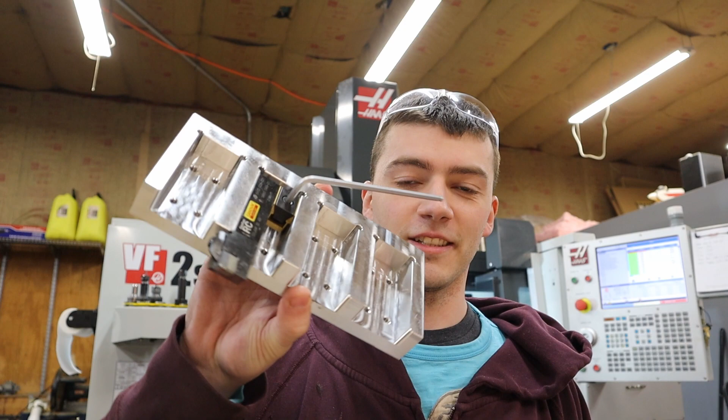We'll be manufacturing the side block out of this lovely piece of 6061. I also realized the main block's made out of 70 series, so that's cool.

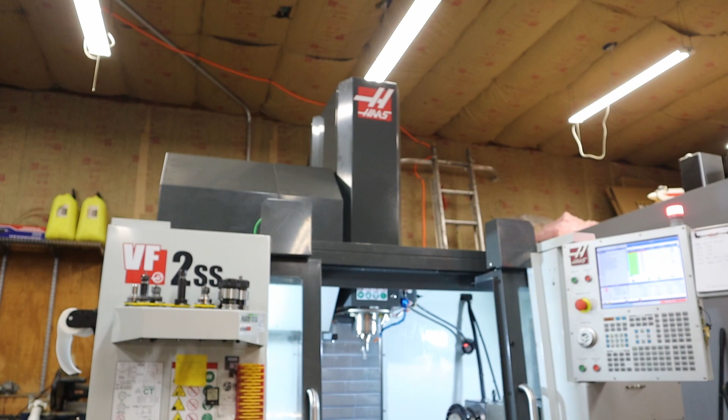Alright, same thing. Let's go over the CAD, and then we'll get right into it.

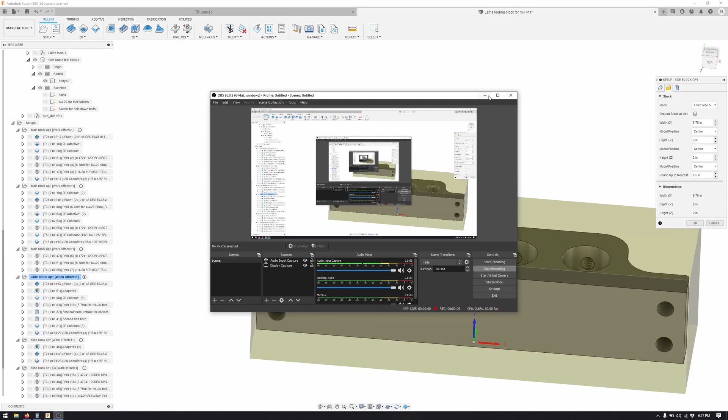If you're wondering what that buzzing noise is, it's the phase converter, so no, I'm sorry, I can't take it out of the audio, but that's what it is if you're wondering. I'm not sure why, but this microphone fixed it up rather well.

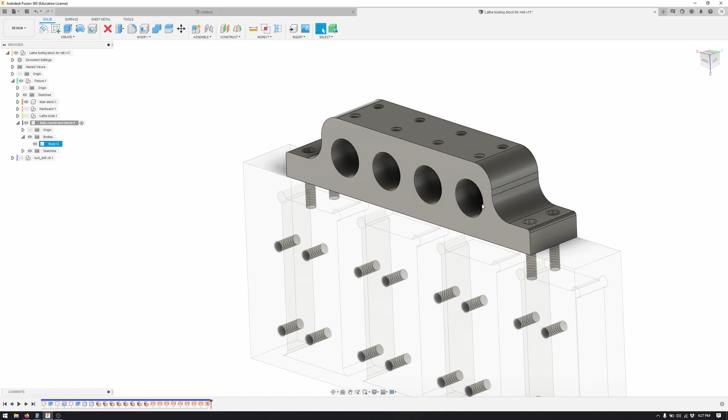Okay, so like yesterday, this is the side block. As you can see, I added some fillets to the edges because I wanted to machine the block up like this and go from the top down and then do the drilling and tapping first. Then when I go on the side and bore the holes, it would clean out any burrs left from the tap.

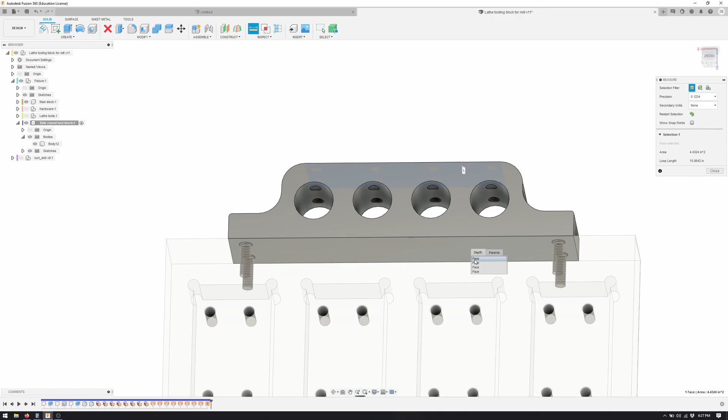Well, this is 2 inches long. Sorry, it's 1 1/4. This distance to this distance, this face here, that's 150, and the 5/8 tool I'm using has a flute length of 1 1/4, so the max I can cut is 1 1/4.

I did just order one reduced shank end mill because they're so expensive, and I don't use them very often, so I just ordered one. Inevitably, what happens when you order one thing, you break it the first time.

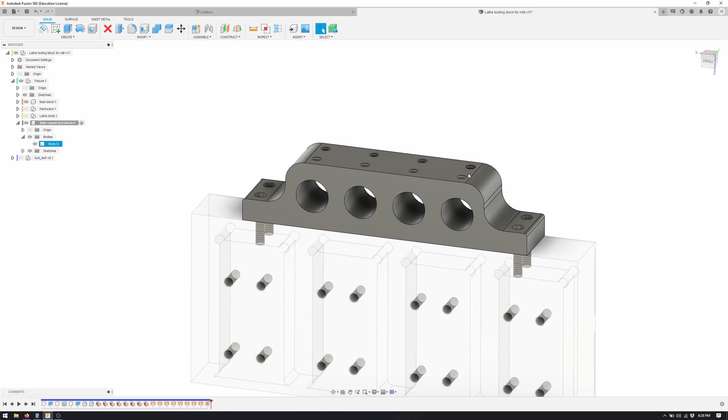But anyways, so basically now I'm going to machine from the side because it's 1 1/4, so that's our flute length, and I just added these fillets to facilitate it not wanting to jam itself in the corner and chatter like it did yesterday. That would just kind of aid in that.

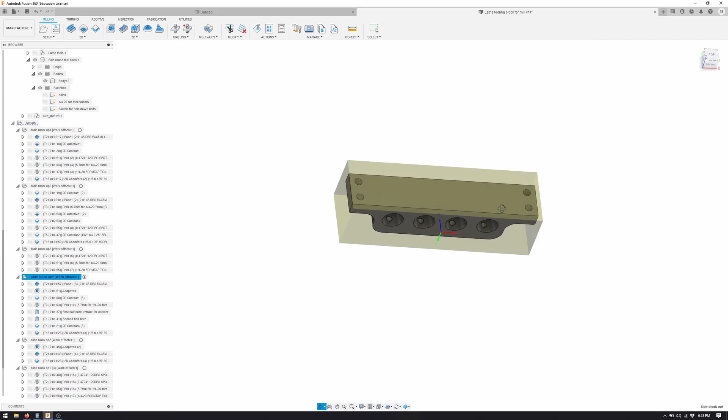Alright, so for Op1, we're starting with a 2x2 piece of 60 series aluminum. So we're going to face down the block. Let me turn on in process. In process is awesome, the stock thing. Face down the block, adaptive obviously around, then we're going to contour and finish it up.

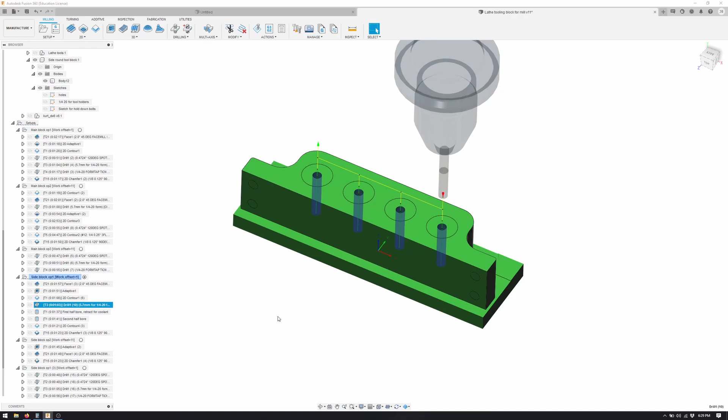Cool. We're going to pre-drill, or just drill to help in our chip evacuation when we go to bore these out. Then we're going to bore them out with the 5/8 tool, and because the bore diameter is so thin, it's probably going to go pretty quick.

Usually I like to avoid chip recutting here, depending on how much coolant flow you have, so it would be good to have something like through spindle coolant.

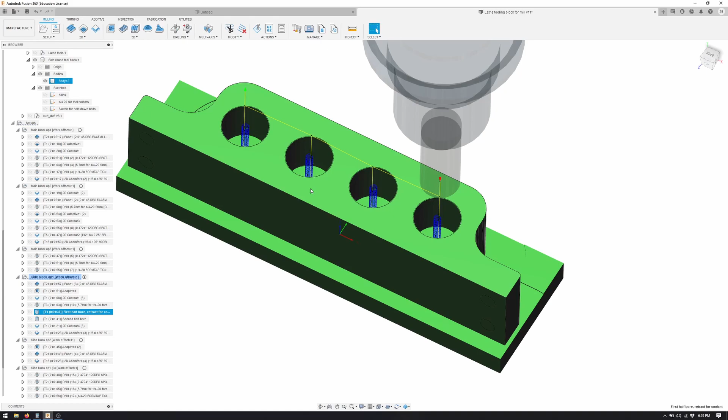So what I'm going to do, since I don't have that, and this is the best idea I came up with in the shortest amount of time, I'm just going to bore half the hole, and then there's a second bore that's the next half.

So basically it's going to retract out, and that's going to allow the coolant to get in there and flush any chips out. This is probably a giant waste of time, but anyways, I'm going to try that.

Then final contour. These need to be 3/4 because this is a tool diameter, and it needs to be pretty precise, but not as precise as if you were making this for the lathe, because obviously a 3-axis mill, we have Z height adjustment as opposed to a normal 2-axis lathe.

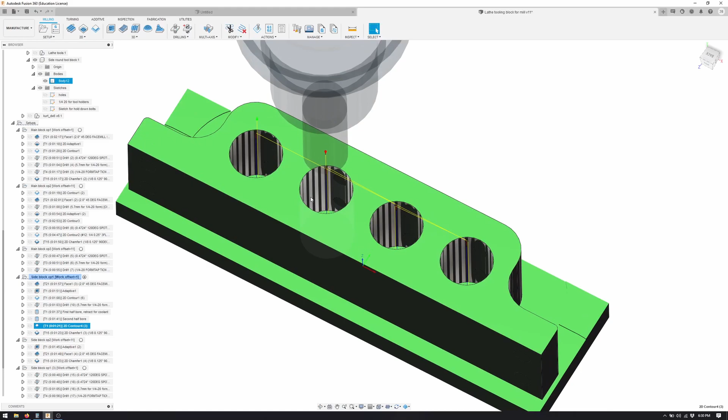So as long as these are straight, they don't basically need to be as precise as you would need them to be for a lathe. Then we're just going to chamfer, finish it up.

That'll be all good. Then for the flip, basically do the same thing as yesterday. Stick a gauge block or something and just find the side. The nice thing is this thing doesn't stick that far out of the vise.

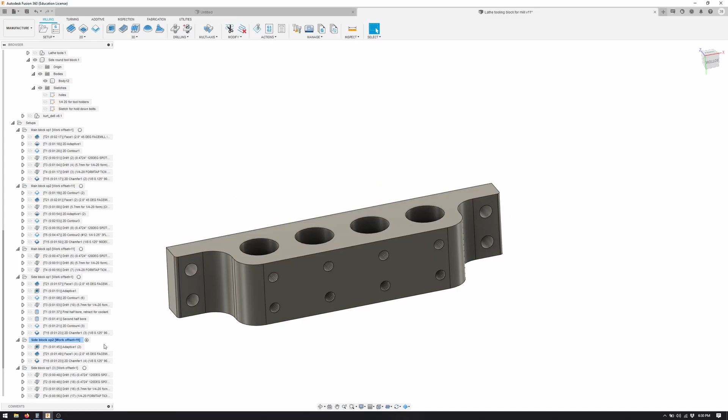This time, instead of contouring the block, the stock is actually going to be square when we get here. And there's no way to select the stock as a contour unless you draw a sketch or something.

So I'm just going to use a 3D adaptive, and I just told it to go from model height and then down 3/8 or something. So it's basically going to adaptive clear away that top hat, and I left enough material on this side, this flip, to where it won't chatter on the hat side.

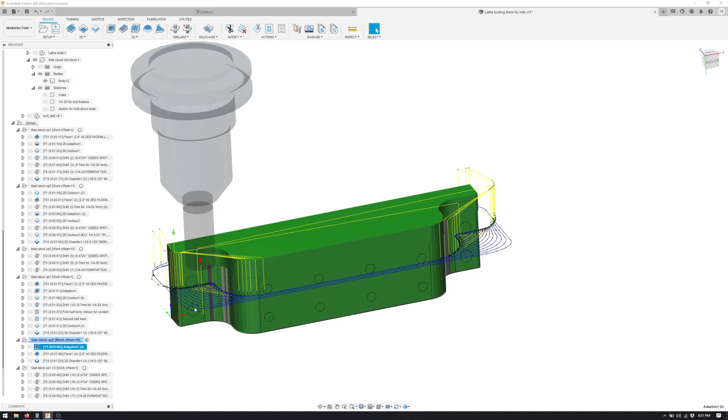I think this is 1/4 inch thick. Yep, so then you want to leave radial material so you don't hit your part. Face down the rest. I would go from the X direction, but like I said, the chuck's in the way of the 4th axis, so you just want to be careful.

And yep, then obviously final chamfer, make it all nice.

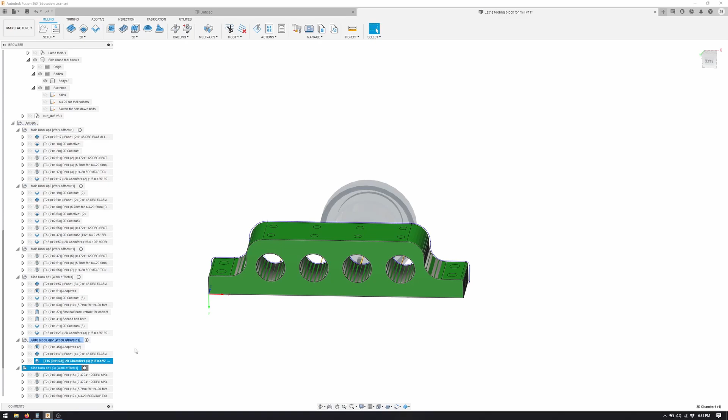Then we get to OP3, which is going to go back into, hold on, this is kind of weird. This should be, okay, it's correct. So we're going to go back to that default G54, which is top of the parallels is your Z height, and then I'm going to just reprobe it in the center.

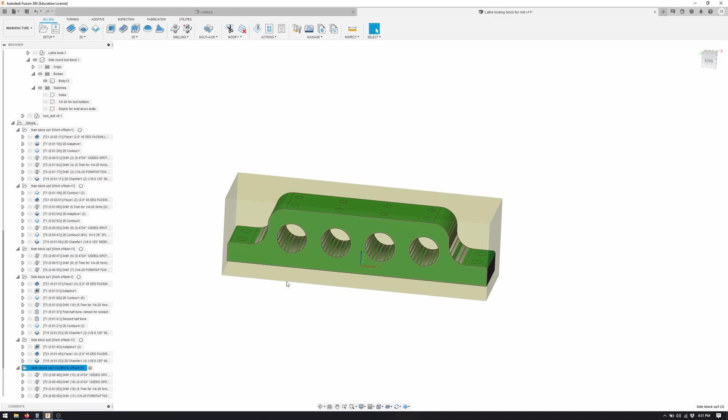We'll have a done block at this point. We're going to spot drill because we're going to form tap, then we're going to spot drill these because I just felt like doing that. Oh, because the chamfer tool doesn't reach down there.

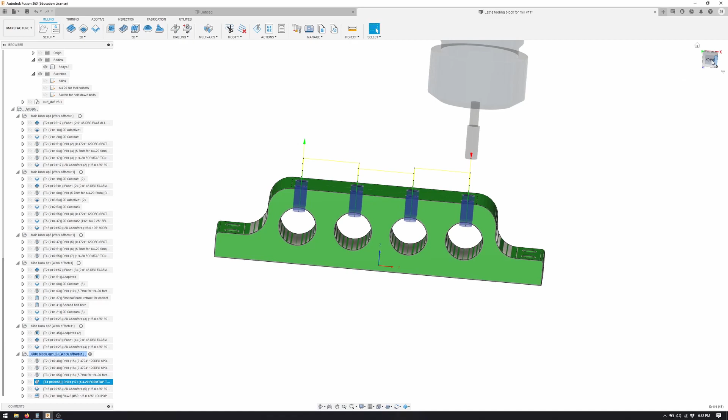Then we're going to drill, form tap like yesterday, making sure to go into the hole and get full thread depth, unlike yesterday on our holes. The reason I wanted to avoid this is because when the drill and the form tap come in here, they're going to want to squeeze material into our bore, and that's going to be a problem, and deburring it is quite a problem too.

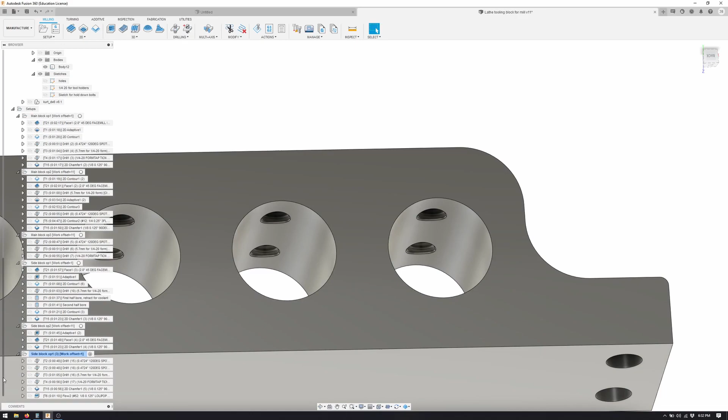So then we're going to chamfer this edge. We're going to come in with a lollipop end mill, and this is one I use for the knife part, so it's really tiny. And we're actually going to use flow and attempt to deburr the backside.

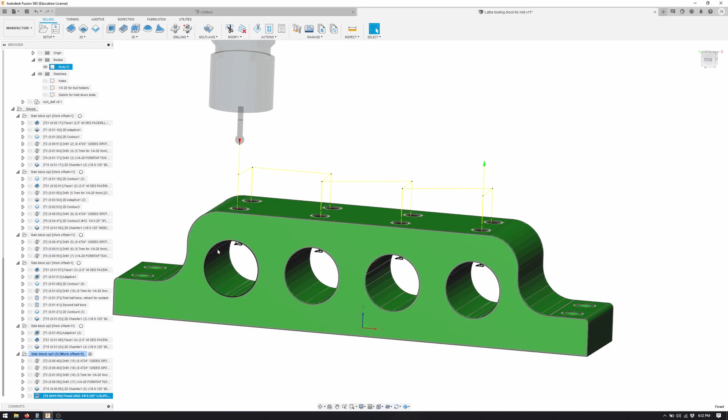I've never done this, and I got some help from Proteum Machining. He's on Instagram, so you should give him a follow. But basically, there's a couple of things you have to do to make this kind of work as good as I'm hoping it's going to work, and this is what we're left with.

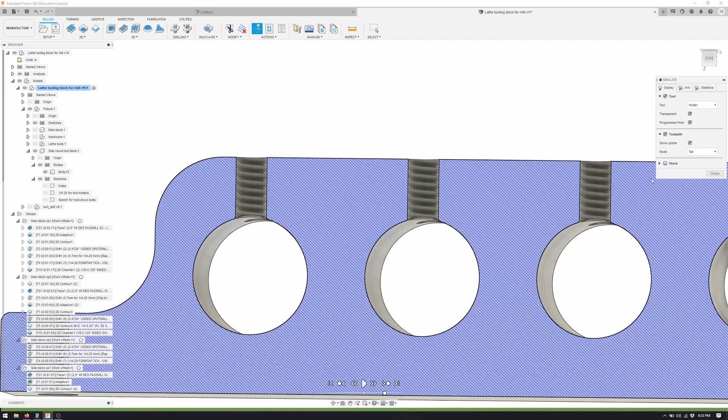Just as an example, I'll show you the simulation, turn on analysis, and turn off the stock. So this is going to come down. It's very close, and then it's going to do that. Hopefully that'll be one good deburr we all need.

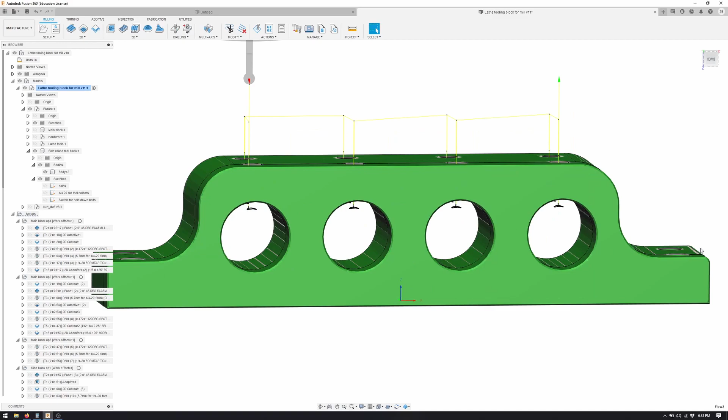This is something I've never done before, so this is all seat of the pants type stuff. And yeah, that's it for the cam side.

So let's go back to real life. Okay, so we got our block loaded up, like I was saying. It's 7 inches wide, so it's a lot less overhangy than the other deal. We'll go ahead and probe in XY because Z is the top of the parallels like yesterday, so we don't need to mess with that at all.

How dare you? Also, I cleaned the windows up for you guys. Alright, I'm going to probe this in and then we'll get started.

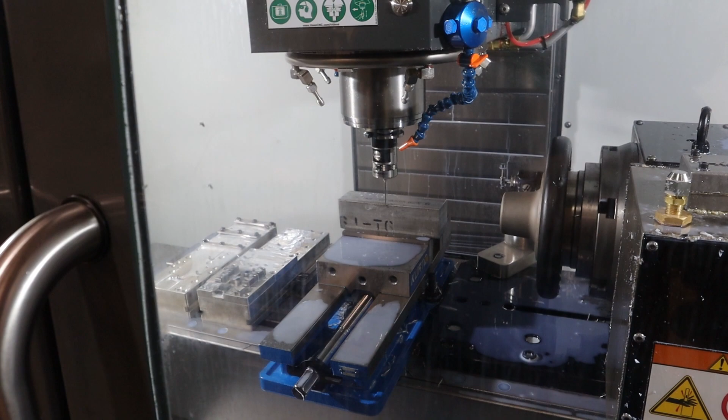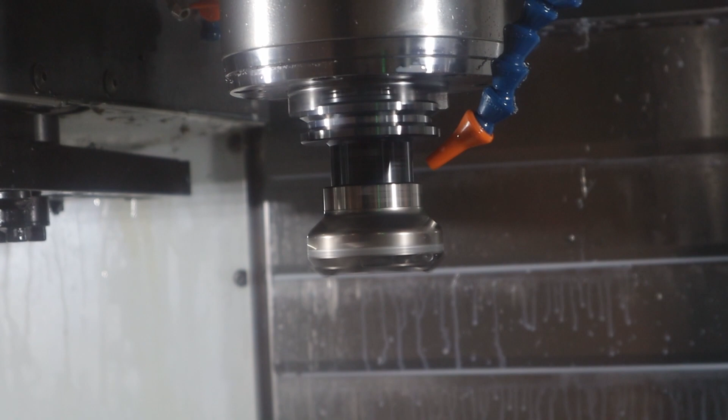Alright. The man, the myth, the legend, the Mitsubishi ASX that I crashed and probably put out of balance, for that white stripe that's in the middle of it. Oh well, still getting pretty good finishes.

Good. Did I tighten the vise?

Oh, that was fun. Gotta be careful with this because it's going to go down on the right side. I'm just going to make sure it's not going to hit the fourth. Looks good.

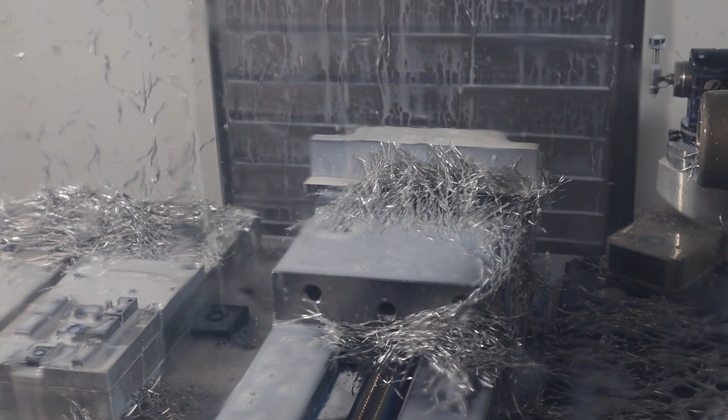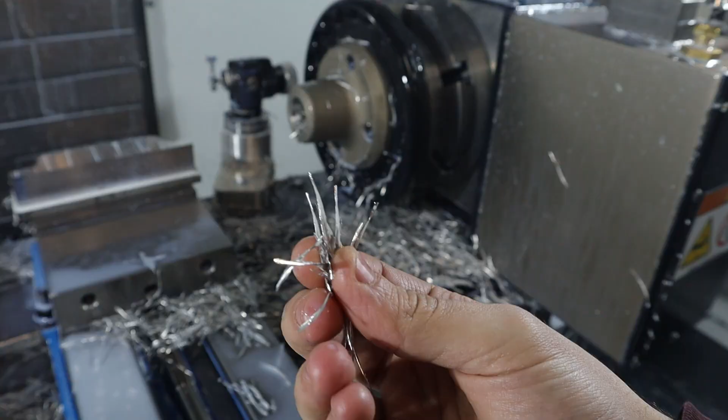Smoky. Man, these are pretty thick. Sweet.

Okay, now we're gonna do that drill thing I was talking about. Hopefully we don't lose the drill. That would not be good.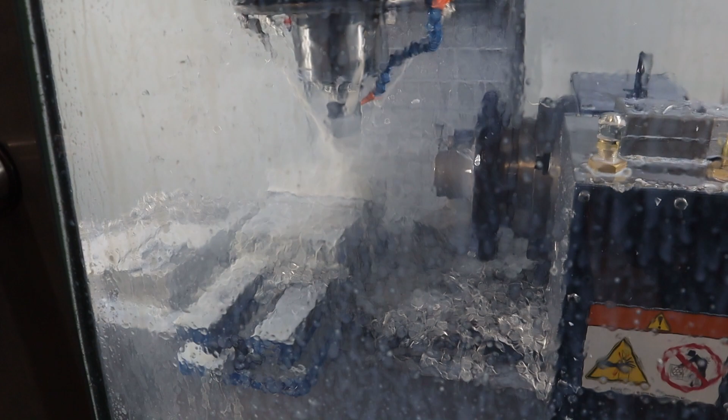Oh, I heard it rubbing. I think it's hitting the flutes, that's why. Yeah, I should probably run a longer drill.

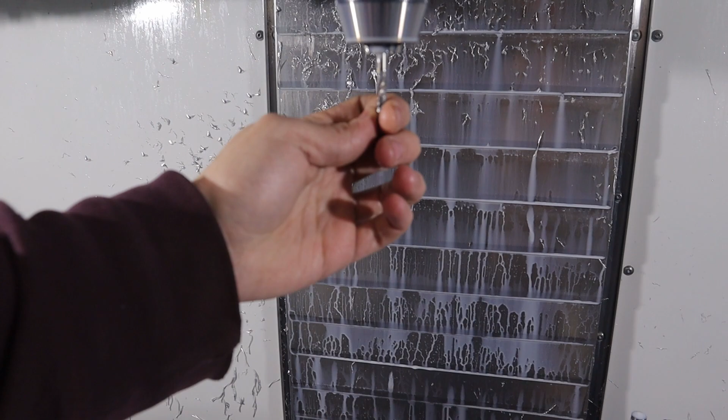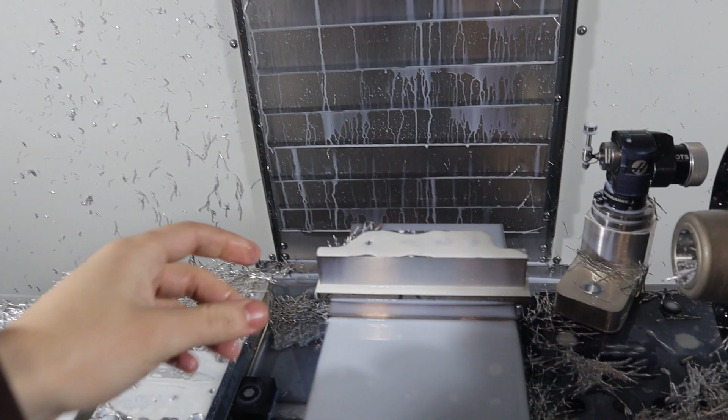So now we're gonna bore, which I'm not entirely sure how this is gonna go, but you don't know until you try. Turn the feed rate down a little bit.

Yes, chip recutting, that's what that noise is. A smaller tool would have been much better for this, allowing the chips to escape, but like I said, the flute length is the problem I'm dealing with right now.

Alright, contour, -5 axial, so it might rub, I'm not too sure. That sounded okay. Definitely the plunge speed's a little low.

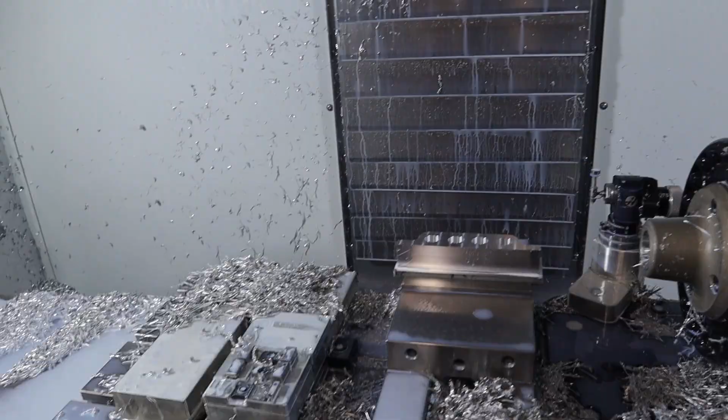Tool still looks decent. Hold on, let me blow this out so I don't get it all over the camera. Well, the finish came out pretty good. Not bad, not bad. Let's see if the tool fits.

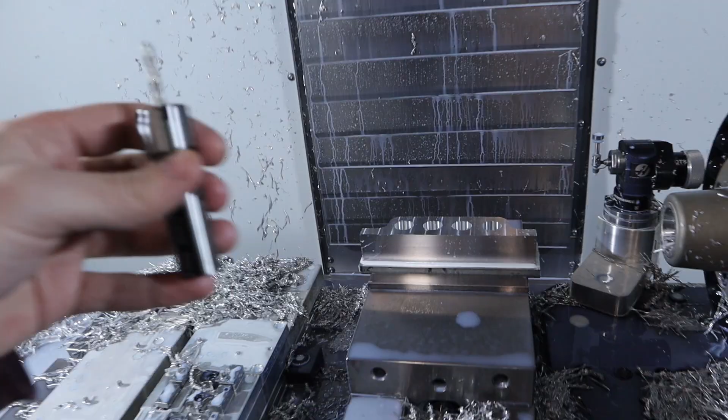Nope, miles away. Sweet. So I'll come back after and bump that at the end.

Next is the chamfer, which is kind of boring, so I'm just going to go ahead and skip that. Alright, got it all comped in, so here's the example.

Very nice, very nice. There is a little bit of side to side, like really not much, so they're going to get clamped or pushed up against the sidewall via some screws. So I think... Really?

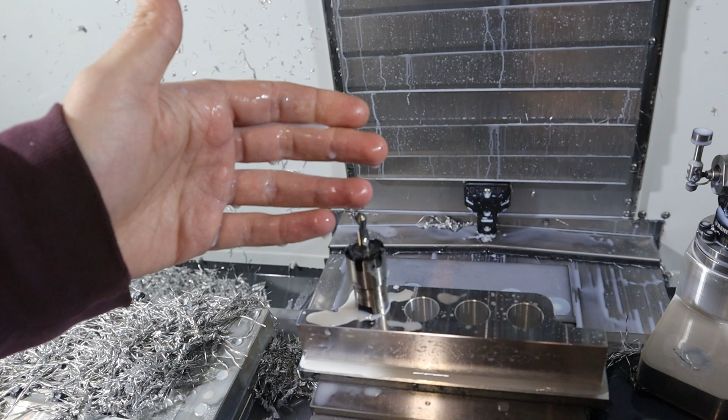Alright, so we're moving on to OP2. I was originally going to use this left side to probe, using offset 11, which is usually what I use for an OP2 kind of thing. But because of that overhang and I don't want the tools coming close over here, I'm just going to use this side.

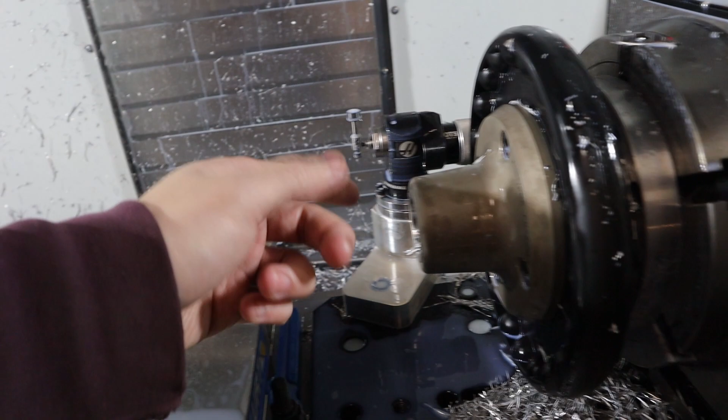So I'm going to show you guys what I do when I'm able to actually get to the side of the jaw there. So we got a gauge block here. This is just a 1/2 inch.

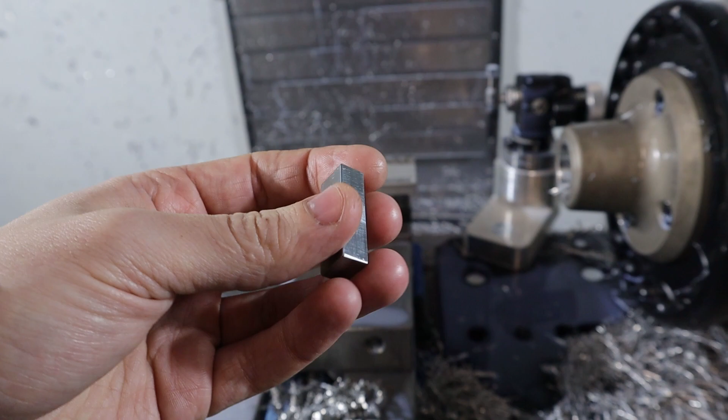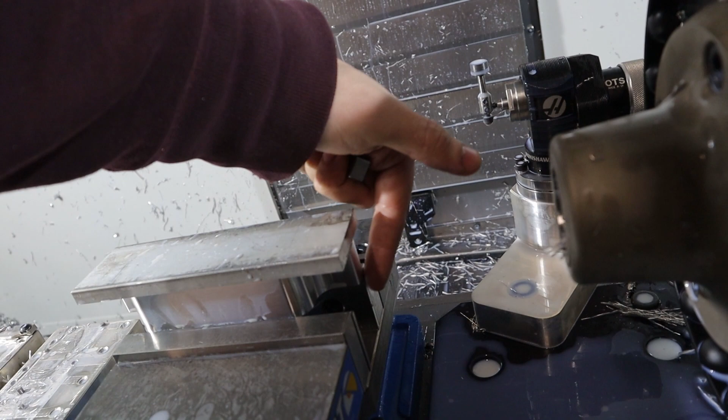It doesn't matter which one you use. What I'll do is stick the gauge block along the edge of the vise jaw that the part is up against, then square the two so you're touching the jaw and the side of the part, push each other until they're parallel, and shut the vise. Then you can probe the edge of the jaw, which will be exactly equal to the edge of your part, and set your work coordinate system to that corner.

So we're just going to do that for that, and then we'll start doing the OP2 stuff, the rough and then the face, and this one's pretty easy.

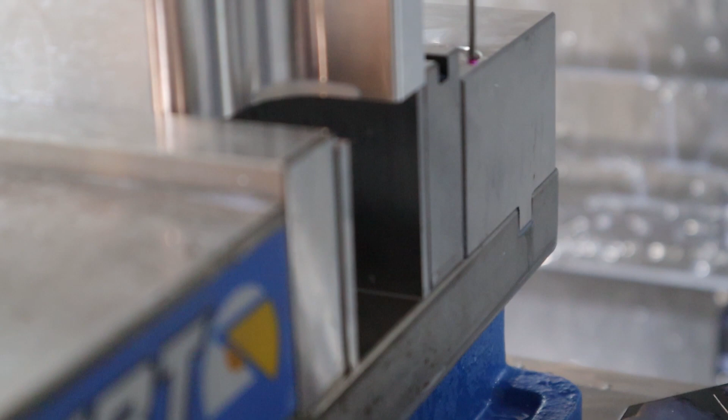A little close, but this is what I'm talking about. So we're going to probe the corner of the vise there, right in front of where the ruby is. But yeah, pretty close. Probably should have done that prior to putting the block in, but oh well.

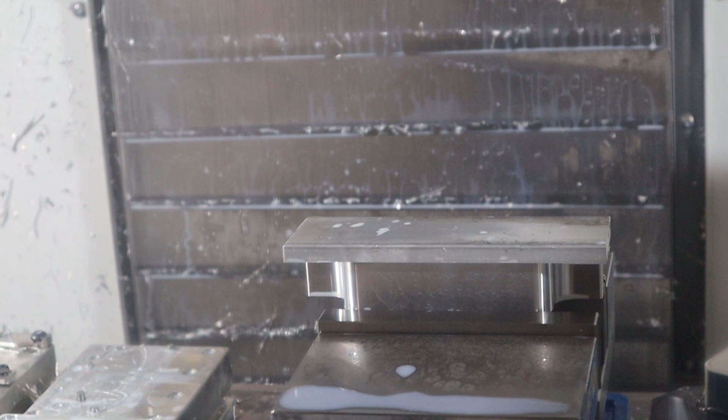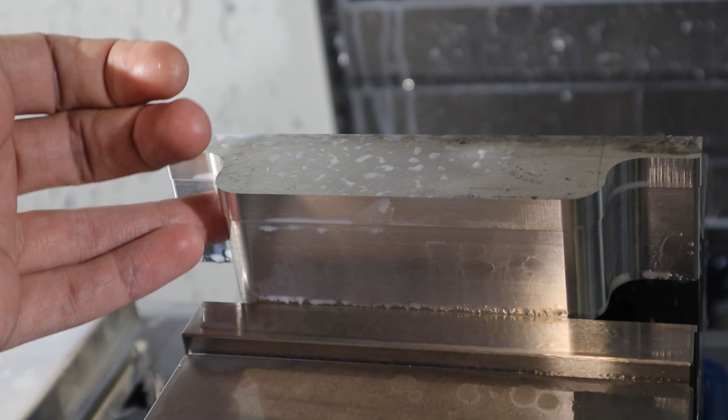Cool, so that's what I was talking about. We are starting to leave, just like yesterday's video. We got this nice, not touching our finished sidewall, and we'll just come here and deck it off, and nobody will get hurt, we think.

So we got it all faced. Oh, hold on. Gotta turn the jams off. Wouldn't want Google knocking down my door.

Alright, so faced it down, good finish and all. Now we're going to chamfer this side, and a good tell to make sure that your work coordinate system and your vise is actually square is if your chamfers line up, and we're about to find out, aren't we?

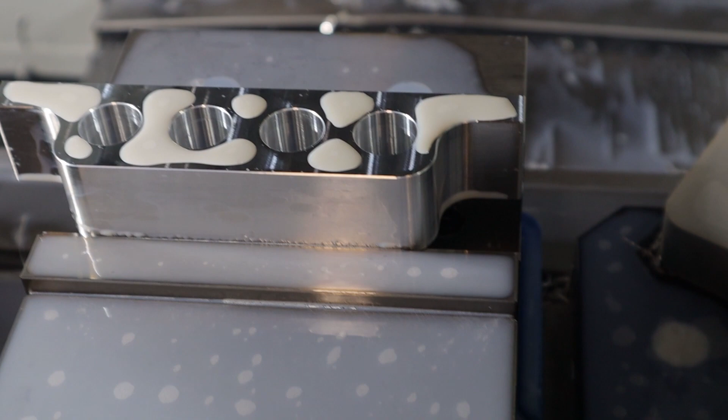Sweet, so you can see the chamfers are equal even around the rings. That means we were pretty much dead nuts on that flip, which is a good sign.

Alright, so now we're going to have this surface facing upwards, and we're going to drill, tap, and do all that other fancy stuff and the scary flow tool path.

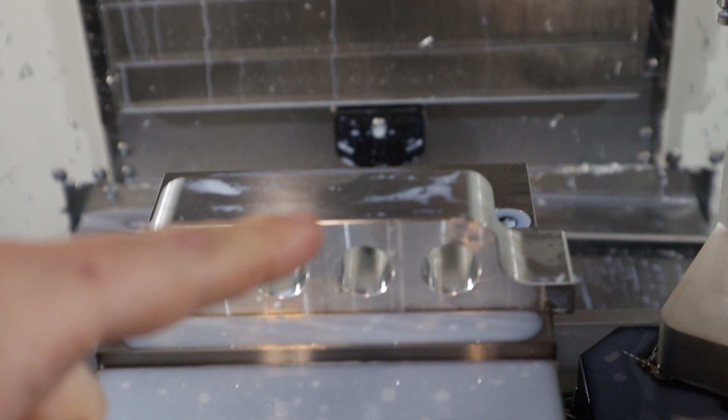Cool, so here it is set up for OP3. We're just going to use the G54 because it's center, and the Z hasn't changed this entire time, which makes it nice and easy. So probe it in center, and then we're going to drill, spot, drill, and then tap, and then we'll do the flow toolpath, and hopefully not break anything.

I think I already said that. Alright, just got it probed in, so now we're going to start our toolpath. I feel like I'm being really redundant.

There she is, the golden child.

Probably didn't need to peck this one just because it's going into the bore, so it would have been okay, I guess. But it's such a short distance. Live and learn. Hopefully we don't hit the parallels on the side holes.

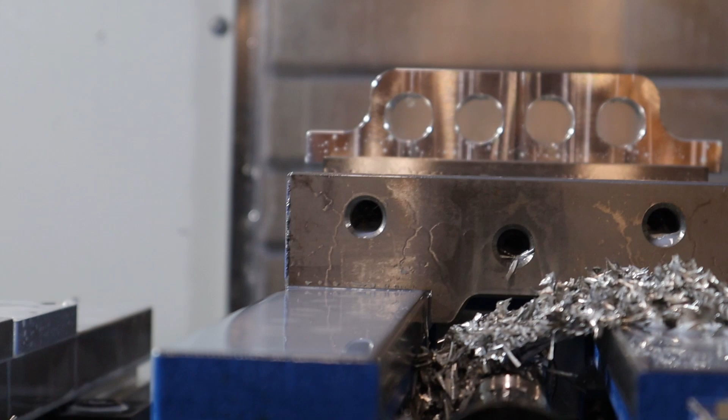So this might be hard to see. Oh, actually it's pretty easy to see. If you look down the bores of those, you can see where the drill and the tap exited. So our tool is not going to fit very good anymore. So my thinking is if I come in there with a lollipop endmill, which literally looks like a lollipop, we might be able to deburr the backside without having to do it by hand and messing up the bore itself. And deburring those by hand, I don't really have a backside deburring tool that can do those.

So we're going to give this a shot, and I've never done this, but it could be pretty interesting and pretty cool, I guess. So basically the tool is going to come in and attempt to follow that bore curve and deburr our circle at the same time. So we'll see. So that's the tool. Looks like a ball end mill with the shank removed.

That's basically what it is actually. But they're very expensive, I mean that's $40+ I think for that 1/8 ball. And I use that for titanium, so. But yeah. Probably don't need coolant for this here guy. I'm gonna make sure the first one goes good and then we'll watch it. I guess we're both gonna watch it.

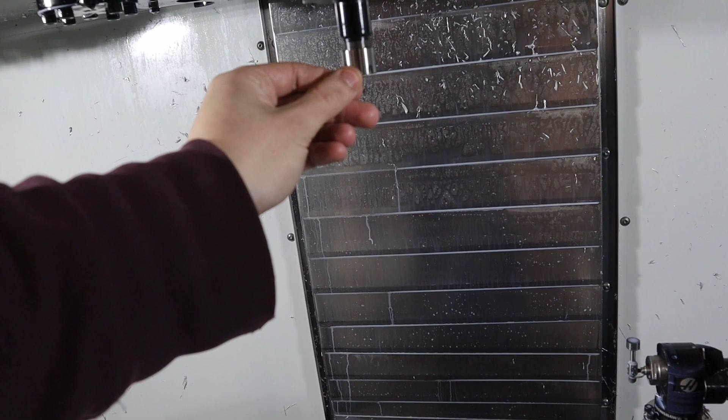Well, as you can see, something didn't go right. I'm not really sure what went wrong because I had it modeled in Fusion properly, so maybe the collet's actually different from the one that's in Fusion. Kinda weird, really super weird. So I'm gonna check it out, but for now, to clean up our little boo-boo, I'm just gonna deck it off a little and clean up these sharp edges, then continue about our day like nothing ever happened.

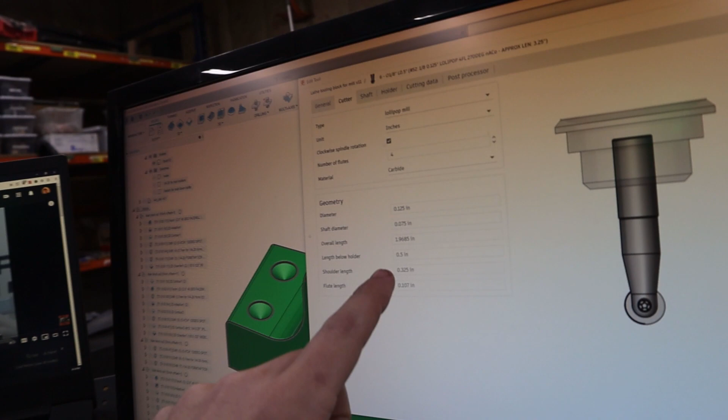Okay, I figured it out. When I made sure the length below holder was correct, it's 0.5 on Fusion, and it looks good in simulation. Well, I was actually looking at shoulder length, and it's 0.325, so that's where the confusion came in, because I thought, oh, 325?

4 or 5? Miles, baby. Miles. Well, in reality, not miles. Yeah.

Perfect. Let's try again. Alright boys, we're back in the ring. Definitely gonna stop it a little sooner this time.

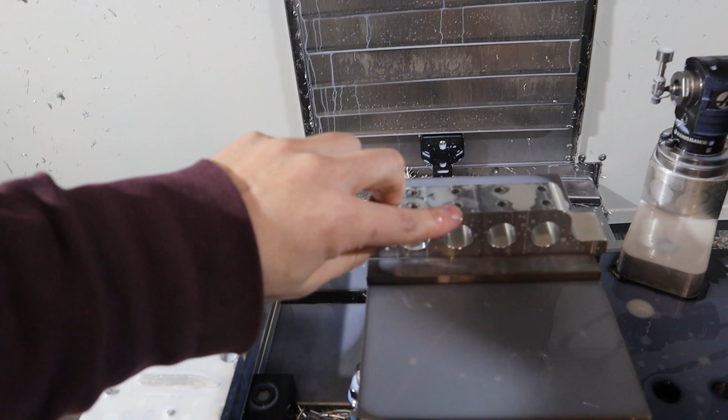Successful after the blunder, but there's still burrs on the inside, so I'm still gonna have to hand deburr it. The ball's not big enough, basically, to deburr without hitting the shaft, so I'll have to figure out something. But basically, last thing, drill these 2 holes and re-chamfer this so we can clean up this little boo-boo and take it out and see what we got.

Okay, let's see. So here's what we wound up with. Our beautiful part, minus this really awesome looking artistic feature. So these are the burrs I was telling you about.

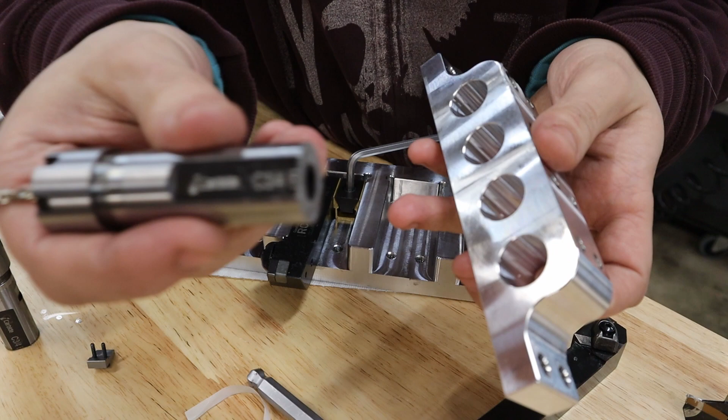Yeah, you see those? Now, I did notice something: the cool thing is, because the tool is flat, it actually kind of just ignores those burrs. Let me grab one that's not dirty. So you got the flat, and then up on the top here. Good stuff, good stuff, that's cool.

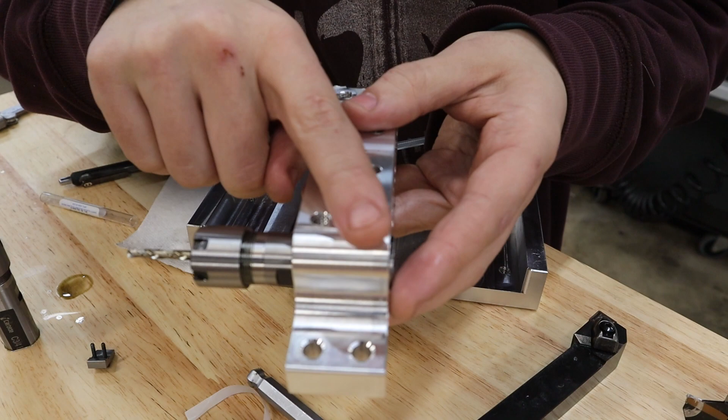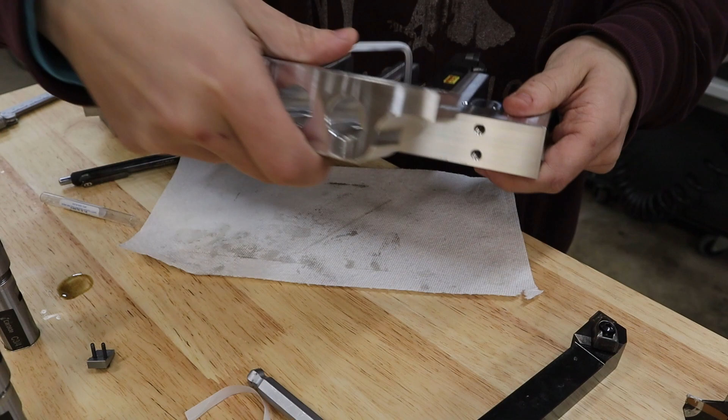So basically, you got quarter-20s that are going to hold the tool in there, and it'll face like this. Let's make sure it actually fits on our block. Remember we did those tapped holes on the back side - that's what that was for. Well, hopefully this works.

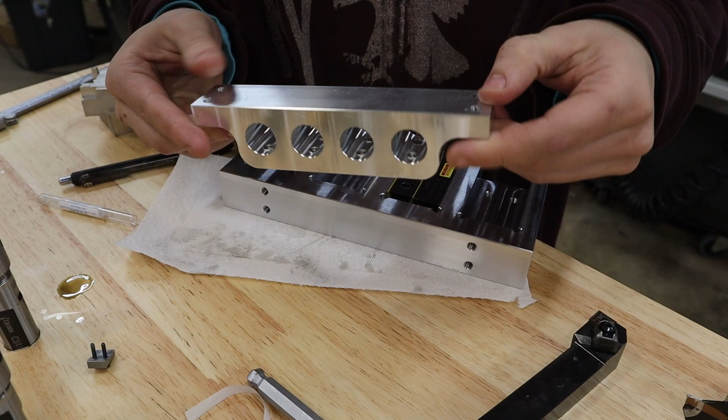So I think it's mirrored, so I can kind of pick whatever side I want. We're gonna put the bad side up because it's got material now sticking over the edge, and this bottom side is actually going to rest flat on whatever device we choose. So when I go to install it, we're going to loosen the bolts up and have it sit flush. Let me go grab some screws.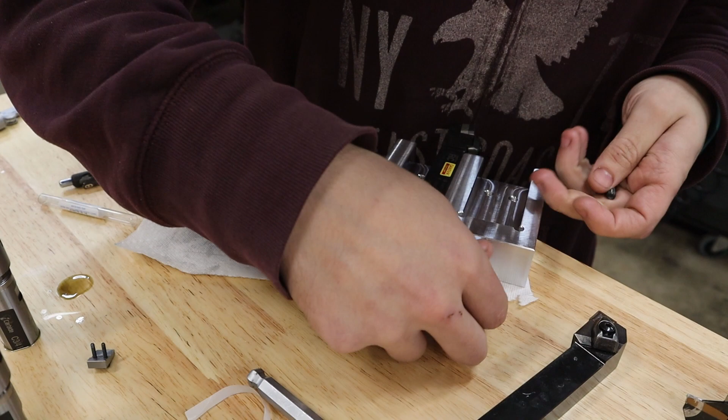So these are just quarter-20s you can buy from McMaster. I buy them in the 100 lot or whatever. And the cool thing is there's a McMaster catalog on Fusion, so you can have them all modeled up, which is really helpful - helps McMaster sell things, and helps me have actual working models of things.

Let's grab a thing. Where is the right size key? This is a good sign, because that means tomorrow is actually figure-out-how-to-make-this-work day.

Very cool, very cool. Let's take one of our tools here. I'm gonna go like this, and that's just gonna sit like that. I like to have a nice large assortment of fasteners on hand - it makes building fixtures really easy.

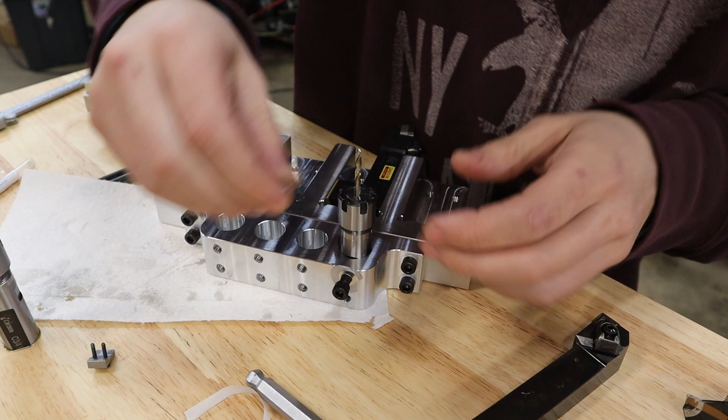So these aren't gonna sit down all the way, but they're basically like set screws - they're just gonna hold our tool in there from moving, and the bore is what's gonna keep it from moving left and right or whatever.

I actually think our lollipop hit the threads, because they don't look as clean as they originally did, but I digress. I actually don't know what that means, but I know what it means in context, not necessarily the definition of digress.

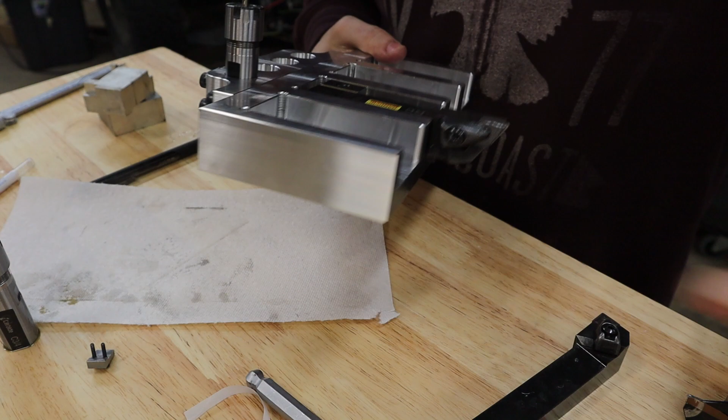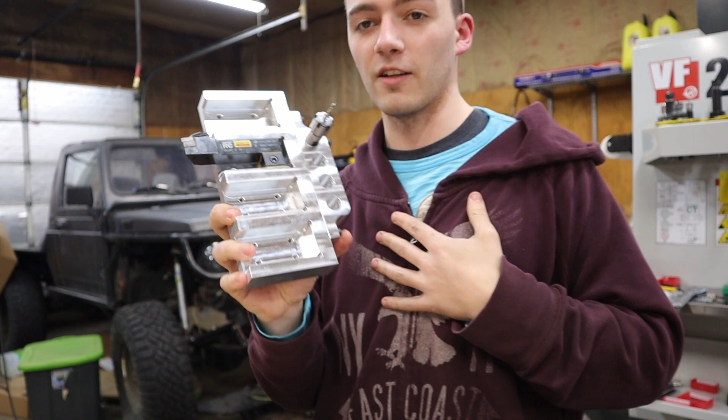So yeah, there she is. Let's get me in the picture - that'd be cool. I, the creator of this fine piece of equipment, that's me. Alright, anyways,

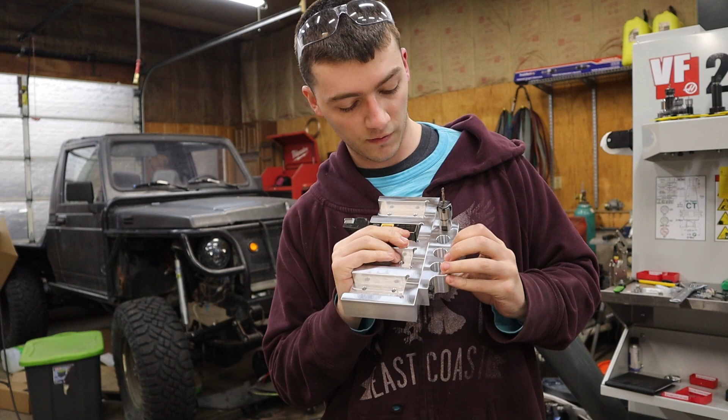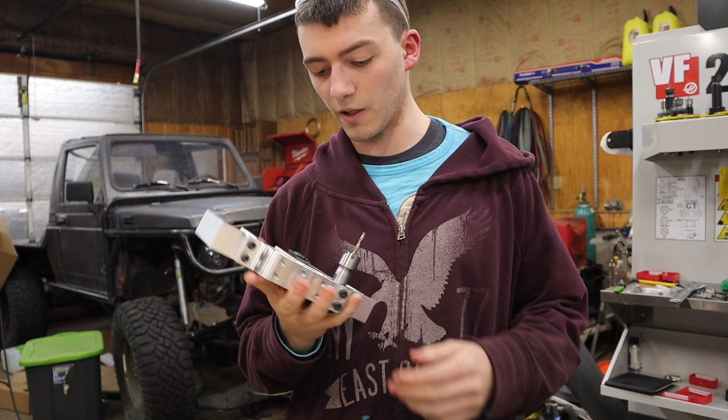So yeah, this has been a fun part 2 of this lathe tool series, but it actually came out pretty good. It took longer than I expected - actually no, it took exactly as long as I thought it was going to take, but this is where we're at, good progress I guess for the weekend. Tomorrow's Sunday, so I got plenty of time to figure out the cam side of this endeavor, and I'll be filming that.